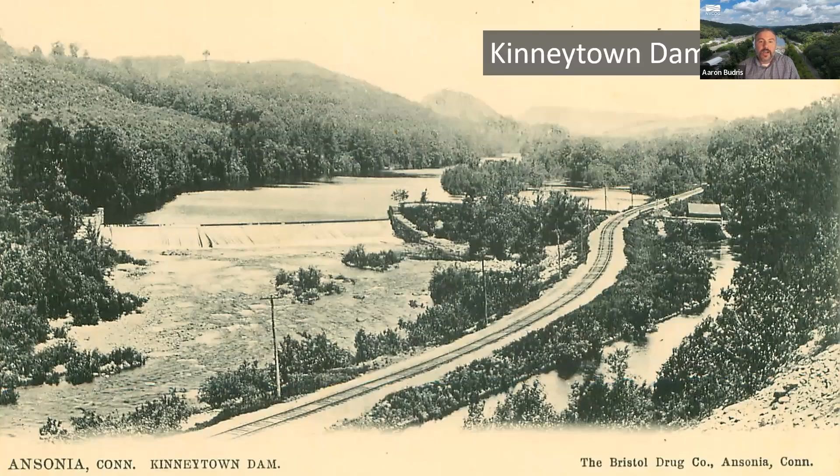So why are we removing Kinneytown Dam? Kinneytown Dam really served a very important purpose in the Naugatuck Valley for a long time. It was originally constructed in the 1840s to divert water from the Naugatuck River into a canal that led to downtown Ansonia, where that water drove industry for over a century.

Later on, the facility was converted to produce hydroelectricity and send that electricity to the grid. It was regulated by the Federal Energy Regulatory Commission, or FERC, as a small hydro project. So it provided electricity to the grid for decades, providing power to residences and businesses in the valley.

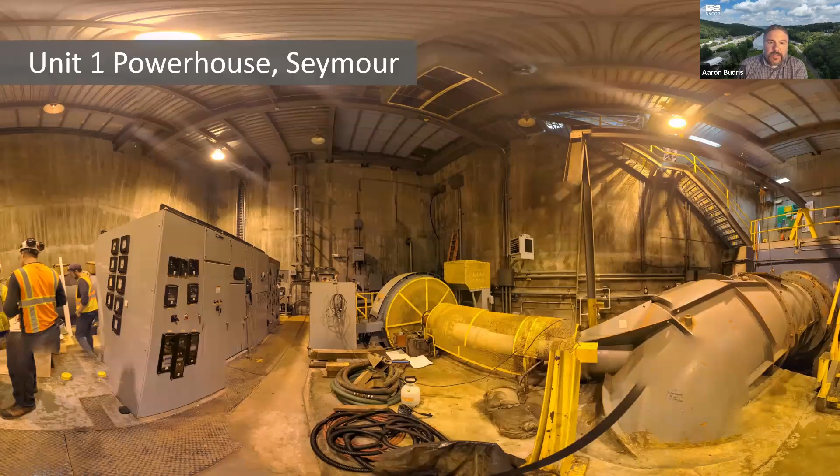But today, Kinneytown Dam doesn't serve any useful purpose. It hasn't produced electricity since 2013 at one of the generating units, and since 2020, it hasn't produced any electricity at all. The previous owners made very little investment, and more recently, no investment at all in maintenance. So it's out of compliance with its FERC license.

The cost of bringing the facility back online in compliance with its FERC license far outweighs the revenue it could ever produce selling power to the grid. It's in really poor condition, and it's just not commercially viable as a power generator.

And that's not just us saying it, the people that want to remove the dam. The previous owners made serious efforts to sell the facility as well, but the market came to the same conclusion. It just does not make any sense as a hydro facility in that location.

So the previous owner was effectively abandoning it, and the facility was just continuing to fall further and further into disrepair. For 175 years or so, Kinneytown Dam really did serve a valuable purpose in the valley, and now it provides no benefit at all, but it's having serious negative social, economic, and environmental impacts. The only real way to remedy all of those impacts is to remove the dam.

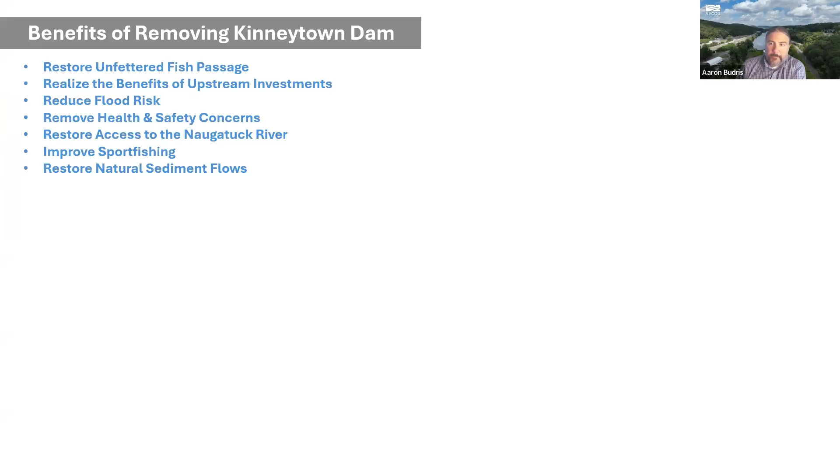So in addition to the financial straits that this structure and this facility is put into, there's quite a few benefits to removing the dam. Save the Sound works on dam removal in a lot of different locations, and this project is one of our biggest and most potentially impactful.

Restoring the benefit to fish passage, the migratory fish species that are likely to benefit from 30 plus miles of main stem river habitat and 30 more for tributary habitat, is a pretty substantial lift for a single project.

We're also capitalizing on the benefits of the upstream investments that have been made. There's a bypass channel at the Tingue Dam. There are multiple dams removed upstream, all providing fish access and reducing safety hazards.

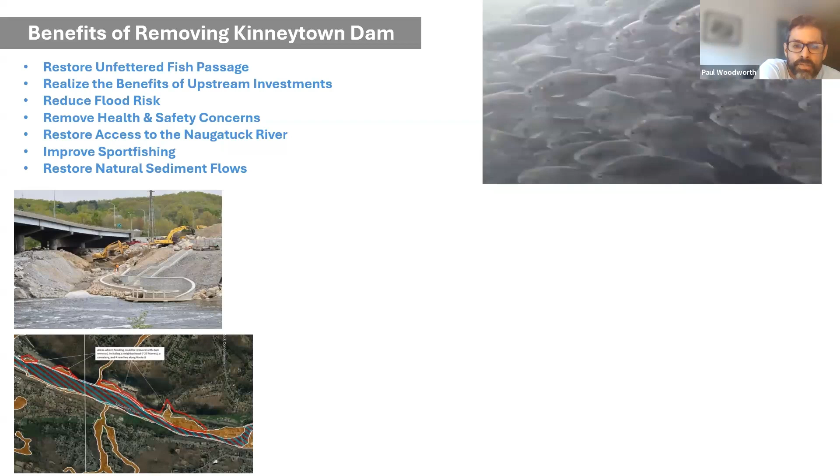This project also will engender some reduction in flood risks to the neighborhoods in Seymour upstream of the dam, which are currently subject to some nuisance flooding. This would lower water surface elevations during some of those smaller events and reduce some of that nuisance flooding.

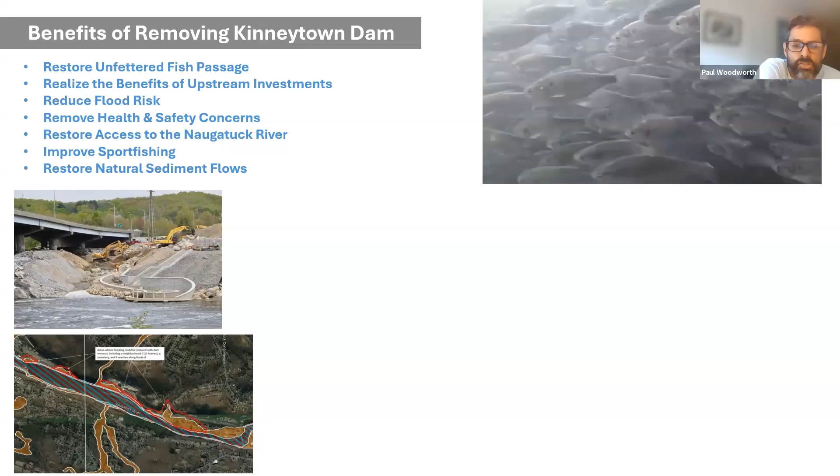There's also health and safety concerns associated with the canal and obviously the sediment that is built up behind the dam. We're also looking to restore access to the Naugatuck River.

Reconnecting the greenway that's existing down in Ansonia and Derby area and bringing that all the way up into downtown Seymour. With this removal, and the increased fishery, we'll have improvement in sport fishing.

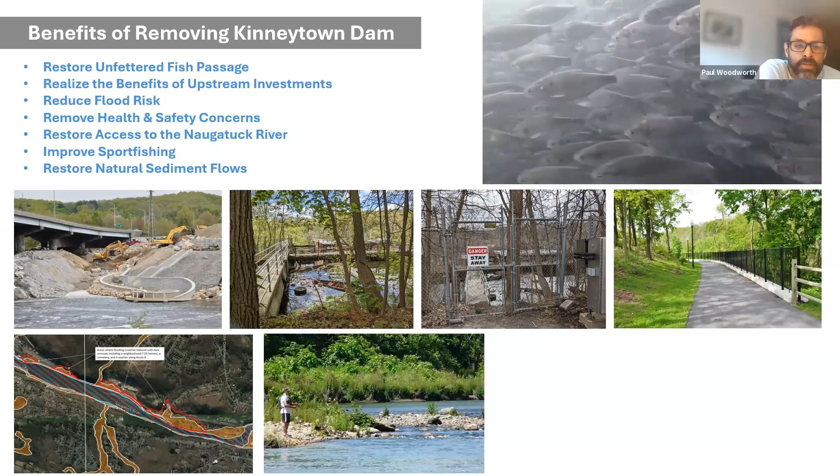In addition to the access to do the fishing in areas that are currently not accessible, we'll also have a broader fish community to fish from.

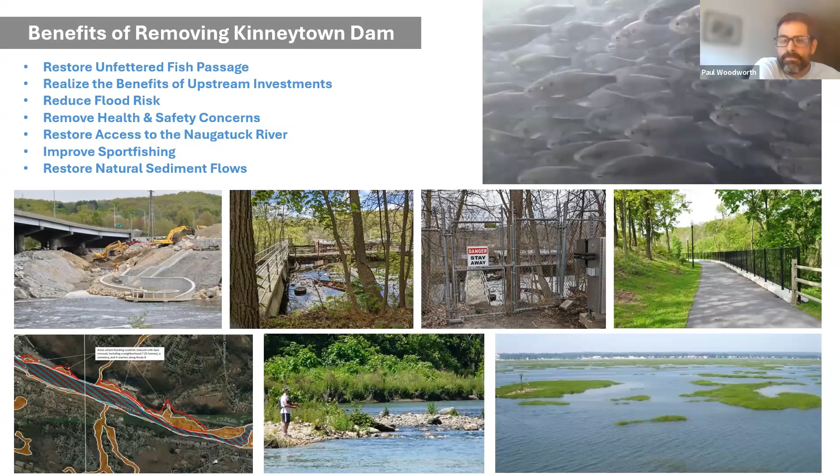And then in the longer term, sort of a bigger picture ecological effect, is restoring the natural sediment flow of the river that's been held back for so many years. So quite a few environmental benefits to this project.

So, we've been working on this project for a few years, and we're just going to give you a quick overview of what the project entails.

We have acquired the facility through the Connecticut Brownfield Land Bank. That was really the first step, was to take ownership of the property.

We've been working on the engineering and design of the removal. We need to relocate sewer infrastructure that's owned by the town of Seymour that goes underneath the river upstream of the dam.

One of the big issues with dam removals, and this one in particular, is managing the sediment that's built up behind the dam. We're going to talk a lot more about that in a little bit.

We need to work through FERC, the federal agency that oversees the project, to decommission it. They have to give the go-ahead to do so, and we're ultimately going to remove the dam, which is actually 2 dams that are part of this project.

Once the dams are gone, we're going to restore the Naugatuck River. As Paul said, develop recreational access to the river, and extend the Naugatuck River Greenway Trail. And we're committed all along this process to engage with stakeholders and residents throughout the entire project.

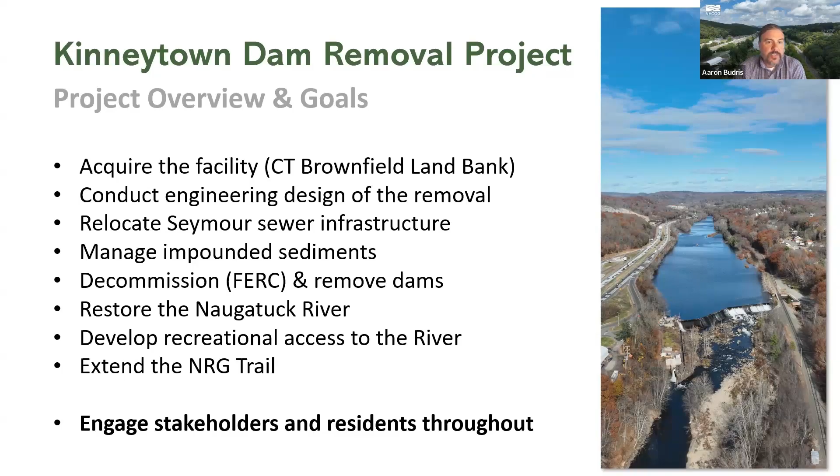As restoration is one of the major goals here, we've got a few guiding principles. We're going to follow all the applicable laws and regulations at both the state and federal level. We're looking to protect the environment and wildlife, which comes part and parcel with dealing with the sediment in a responsible manner.

We're trying to protect the infrastructure that's going to remain, that's Route 8 and the Waterbury rail line on either side of the river. Both need to be protected long term. We need to leave the entire property in a safe state, the footprint of the Kinneytown Dam and powerhouse, Coe Pond, and the area surrounding the Ansonia structure. Ultimately, we're trying to provide safe public access, perhaps under the existing bridges along the rail line, with the overarching goal of restoring river ecology.

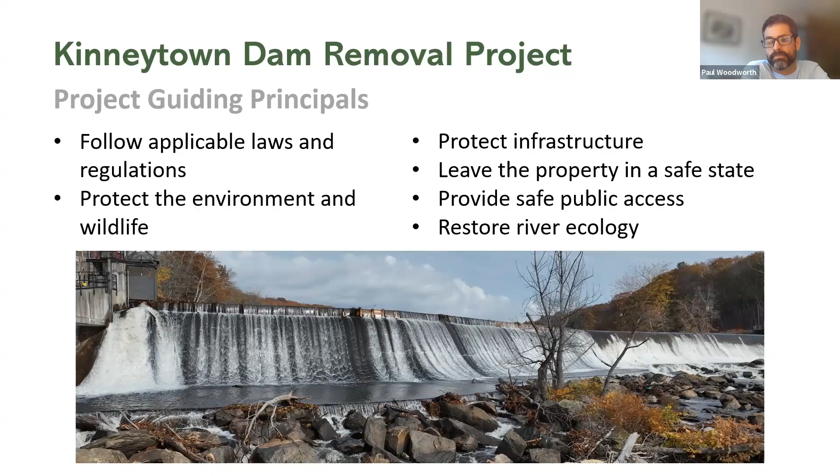We've put together quite a bit of funding for this project. We still don't have enough money to do the entire project yet, but we got started with a pretty big grant in 2023 from NOAA, the National Oceanic and Atmospheric Administration, who gave us a $15 million grant. With the state of federal affairs right now, they've informed us they're going to be withholding a fair amount that we have not spent yet, a little over $10 million. But that's not going to stop the progress we're making right now.

We've found other funding committed to the project. We have funding from Connecticut DEEP through their supplemental environmental program of $1.6 million. That's going to fill the gap in the short term so we can continue our design work and sediment management work. We've also had a huge commitment from EPA's Targeted Brownfield Assessment Program, and we'll talk about some of the information they were able to gather for us that's going to inform the sediment management and the dam removal.

We have quite a bit of congressionally directed spending allocated to the project, and funding through the DEEP Rec Trails program for trail design of the Naugatuck River Greenway through the property. You may have seen in the news this past week, we've been awarded $4 million through the DECD Municipal Brownfield Program to help us get started with sediment management. And the really big thing is the state legislature has committed $25 million in state bond funds to this project.

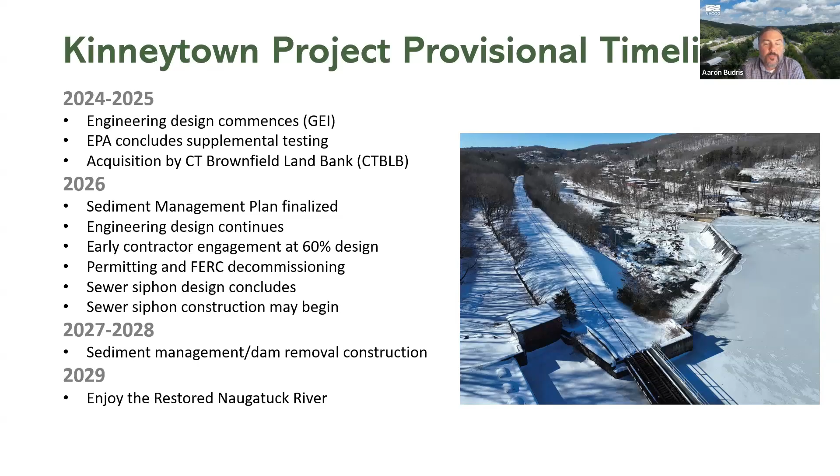So just to give some updates on some of the major parts of the project, the biggest movement in the past several months for us has been the work we've had to do now that we've taken ownership of the property through the Connecticut Brownfield Land Bank. They acquired the property in October of last year. The land bank did send encroachment letters to several properties or residents who were encroaching on the property.

We submitted a transfer of hydropower exemption to FERC. So the Connecticut Brownfield Land Bank now holds the hydropower license. The previous owner had been ordered to do a whole list of things by FERC, very few of which they ever did or were interested in doing.

A lot of those pertain to restoring the hydro power facility and restoring power generation. We know that's not possible, and it really doesn't make sense in the context of us removing the dam. So we asked FERC for regulatory relief for several of those items. They concurred, but Connecticut Brownfield Land Bank is still responsible for safety and compliance on a lot of safety issues.

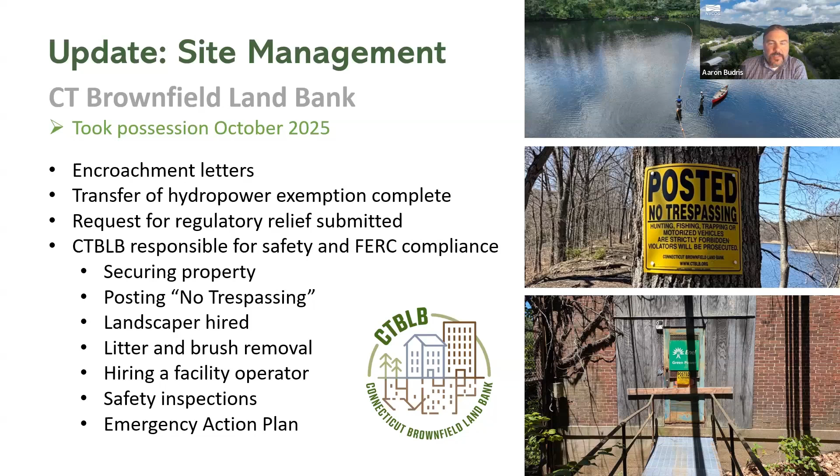On the Seymour Sewer relocation portion of the project, we've hired CDM Smith Consulting Engineers, who's doing the design to move those two sewer siphons that go underneath the river upstream of the dam. The flow from those two are going to have to be rerouted to a new siphon below the dam.

Last year we went to the town, presented a preferred alternative that the town approved. CDM's through 30% design, on their way to about 60% design. They've held a permitting pre-application meeting a few months ago. They've met with all the regulators and have a path forward on permitting. We're expecting the design to advance to a point where they'll be submitting their permit applications later this summer.

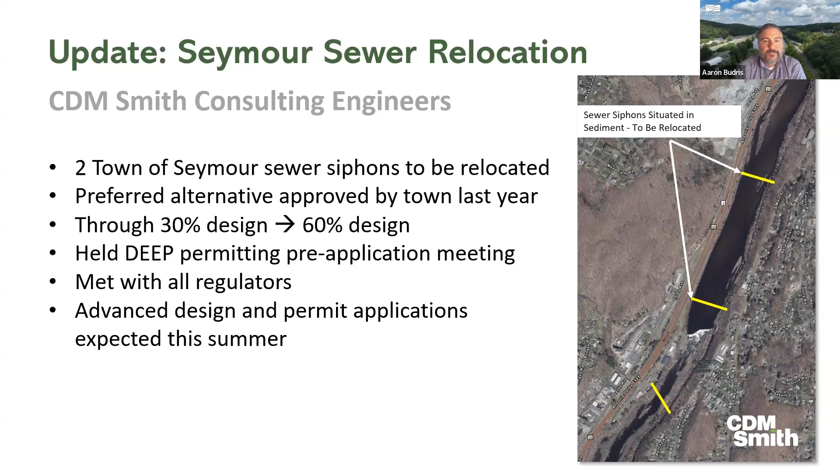Like I said earlier, we're committed to doing really robust community engagement on this project. We want input from the public. We want everybody to understand what we're doing and why we're doing it.

So, we have 2 community liaisons that are available to talk to residents or stakeholders. We've done neighborhood canvassing in the past, trying to get more people to these meetings, and we'll continue that in the future. We've moved these meetings to quarterly. We started off every other month, just so we're not repeating ourselves, and we know your time is valuable, so we don't want to bring you out to these too often, but we are going to continue holding these quarterly meetings.

We have a monthly newsletter that goes out. If you're not on that list, you can sign up on our website.

We also started doing downstream outreach to the communities, the industries at the mouth of the Housatonic that may be impacted by the dam removal. We've started early outreach to them as well.

Save the Sound is working on a documentary film. It's going to be a 3-part film. They've shot some interviews with residents of the Lower Valley for the first film, which is going to really be about the history of the Naugatuck River. So we're hoping to have something pretty soon for our team to look at, and hopefully we can get it out to the public as soon as possible.

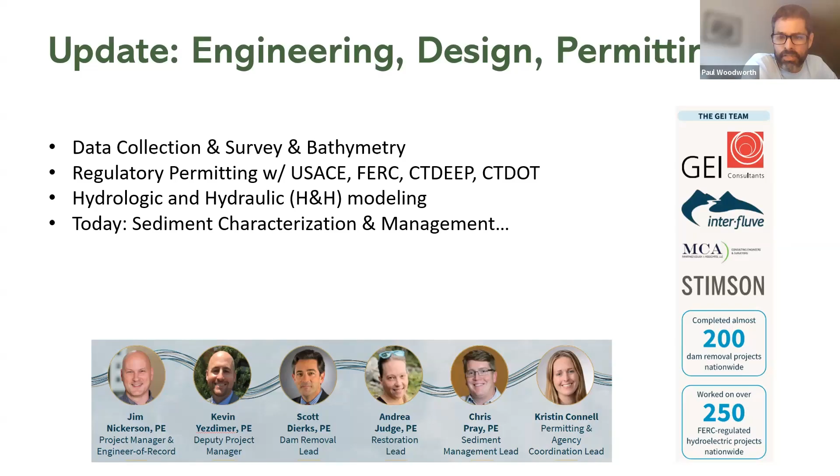Aaron, next slide. I think we have a couple of visuals of the impoundment. Were it not for sediment at this dam, this would be a much more straightforward and less costly project. The vast majority of the funds we're trying to raise are to responsibly manage this amount of sediment behind it. The upper left image shows this pillowy, dune-like surface - that's essentially the superficial sediment that has basically filled this impoundment, and it is mobilized and transported over in larger flow events.

The upper right is what it looks like when we were able to draw down water for the sake of safety and repairs to the spillway. The lower right-hand corner shows how shallow it is very close to the dam. That image shows the spillway on the left-hand side, and our staff on the right-hand side installing the safety line, basically in knee-deep water, only about 50 feet upstream of a 25-foot high dam. So not an insignificant volume, and Scott will go into more detail.

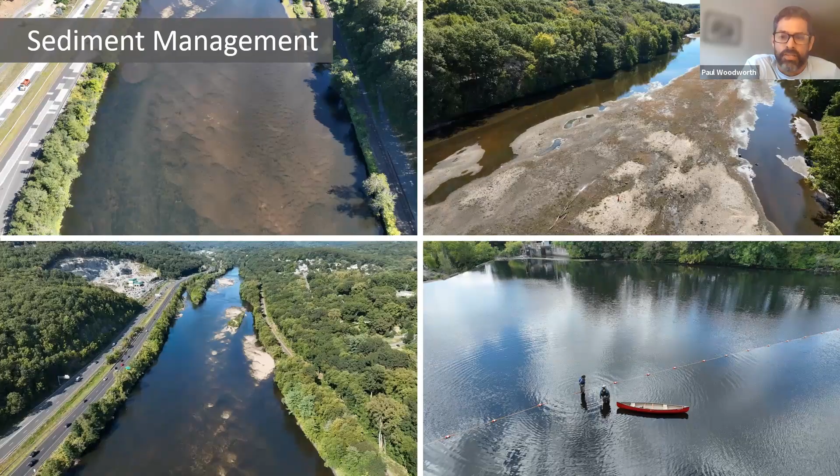Next slide, Aaron. EPA has been involved in the assessments. The phase 1 assessment was more focused on the structures and the footprint around the structures. Phase 2 became an investigation of sediment, and then we had a supplemental phase 2 assessment that looked in more detail at various depths to better characterize the distribution of contamination through the depth and across the impoundment in Kinneytown. It's with those sets of data that we're able to move our sediment management plan ahead. From there, I'll pass it to you, Scott.

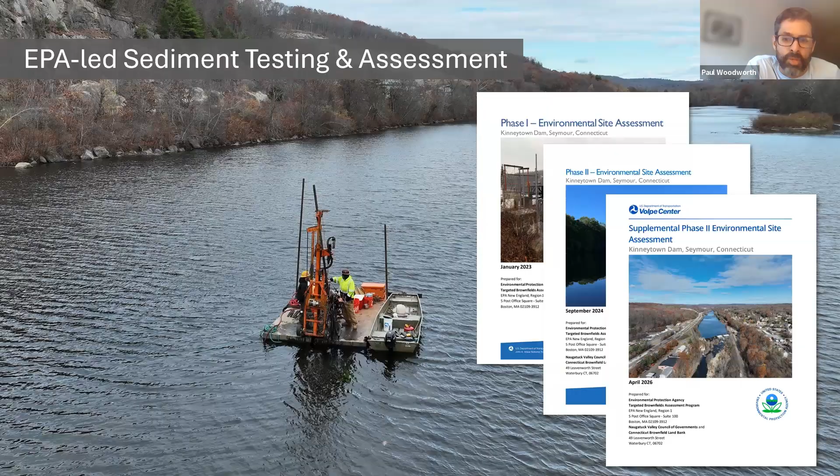Thanks, Paul and Aaron. Let's see if I get this sharing right this time. Do you see my first slide, the title slide? I see your presenter view, I believe. So I see your first slide and second slide - is that what's going out to everybody? I'm so confused. If you go up to the top, it should allow you to switch. Go to display settings and that dropdown, you can swap presenter view and slideshow, and that should set you up. There we go, there you go.

Perfect, thank you. All right, good evening everybody. Again, my name is Scott Dierks, one of the technical leads on this project for GEI. Appreciate the opportunity to present these updates, both on sediment management and on channel design - they really go hand in hand.

So I wanted to start off with a slide that I believe Aaron presented at the last community meeting. I really like this slide because it shows... let me try the laser pointer. Can you see my laser pointer now? I'll assume that's yes. Yes, we can. Okay, thanks.

What I like about this project is that you see the history of what occurs behind a dam in terms of sediment. The first thing I want to point out is this coarser material at the bottom, both above the dam and below the dam.

This is meant to represent the old channel bed, where the channel resided before the dam was placed. It's a nice representation because we're seeing the same thing at the Kinneytown Dam, where we can estimate where the channel was, both how deep it was and where it was across the channel.

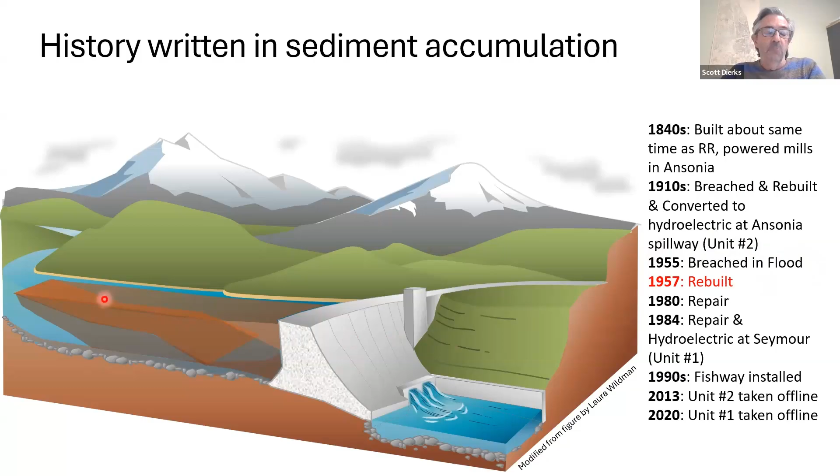Another reason I bring that up is because the dam itself has been breached and rebuilt a couple of times. The most significant was the hurricane in '55, which breached the dam, and it was completely rebuilt. When the dam was breached, all that sediment, at least to the point of the breach elevation, would have been lost downstream. So we had a replacement of sediment over time with those breaches.

The other reason I wanted to start with that slide is that the design process and sediment management process kind of starts from the bottom up. We want to understand where that old riverbed was, and we did this in a couple of ways.

There were a lot of different groups involved, including Save the Sound, our consultant Interfluve, and EPA and Volpe, out grabbing sediment samples with mechanical equipment that would drive borings down through the sediment. This material here is relatively fine, mostly sand all the way through, and then toward the bottom you can see this coarser material, which essentially represents that old riverbed where the channel used to be.

Another technique we used was driving very thin steel probes through the sediment until you hit what we call refusal, knowing that sediment at the bottom of the channel tended to be coarser, and in some cases may even be bedrock. We don't always know, but by driving these rods through the sediment, you can drive them quite deep, 15, 16, 17 feet, by hand.

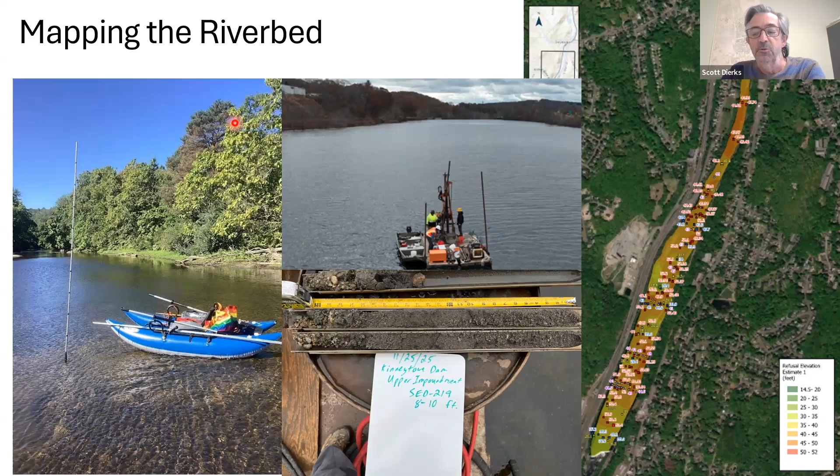While we have the depth of refusal, the old stream bed mapped, you can't map every square foot of it. So we use a set of tools to figure out how big the channel needs to be. One quick way is looking at what the channel looks like downstream and upstream. There are also general relationships in stream design work, knowing how much water we have to deal with and the slope. Those are all parameters in the design process, so we come up with an estimate of how big and deep the channel needs to be, and how much room is left for floodplain.

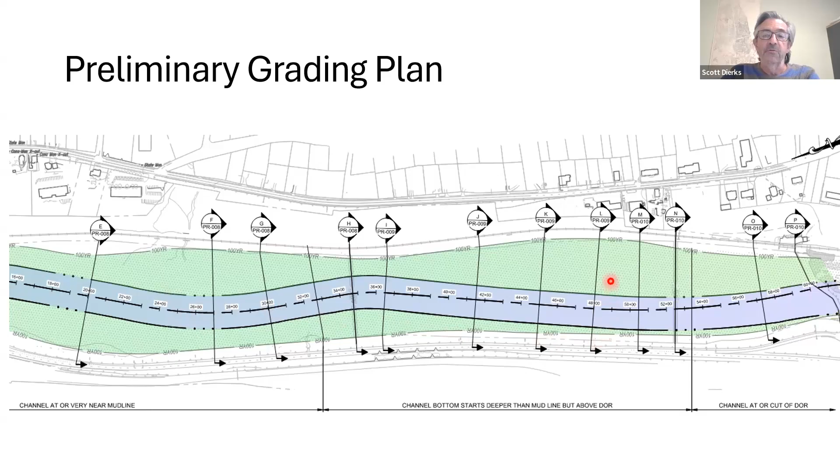Here's an example where the black lines represent 1-foot increments vertically. You can see the channel banks descending down to the proposed channel bed, and then grading along the banks, or valley walls, of the channel.

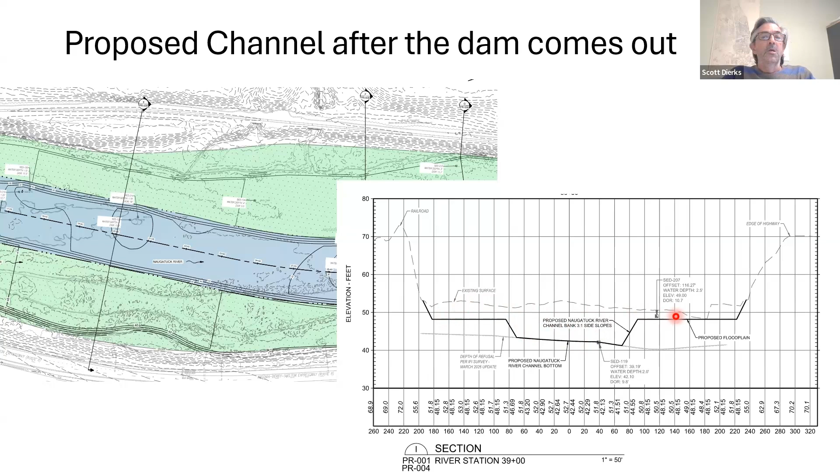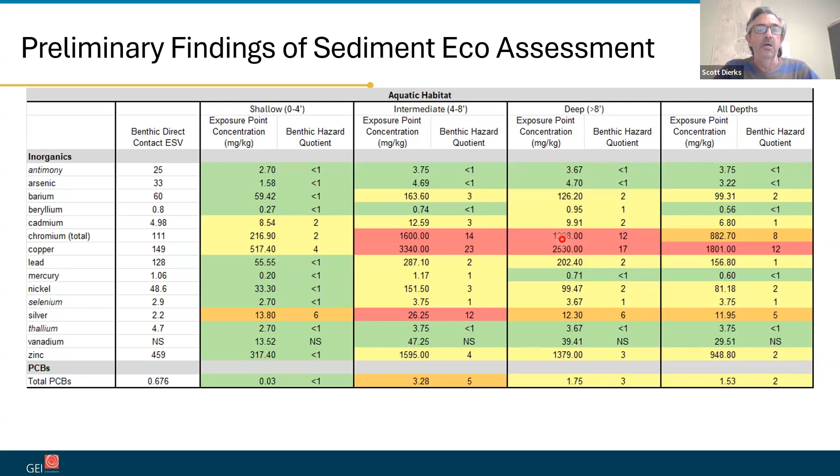So the newer sediment, the 0 to 4 feet, shows green meaning no ecological impact whatsoever. Yellow is potentially no impact but with some marginal concern, and orange is marginal to some impact, but nowhere near the intensity seen in the lower sediment. So we basically have three buckets. This data was developed by Volpe and EPA, who sampled across the impoundment, taking sub-samples at depth so we'd know at what depth we were seeing these constituent concentrations.

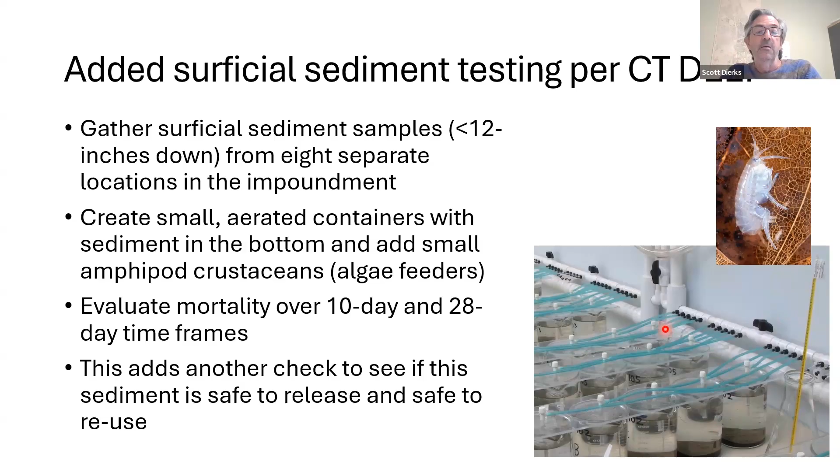So now moving on—again, sediment management and the dam removal and dam design all work together, so to speak. Everything at every step of the way, both in the removal process and in restoring the channel process, we have to keep an eye on sediment. First off, I'm going to give you a broad overview of the dam removal process and how it will potentially play out in Kinneytown.

First off, we will lower the river. We've got some pipes and some valves that we can use to lower the water level a little bit. And then at some point, we will have to start literally notching the dam.

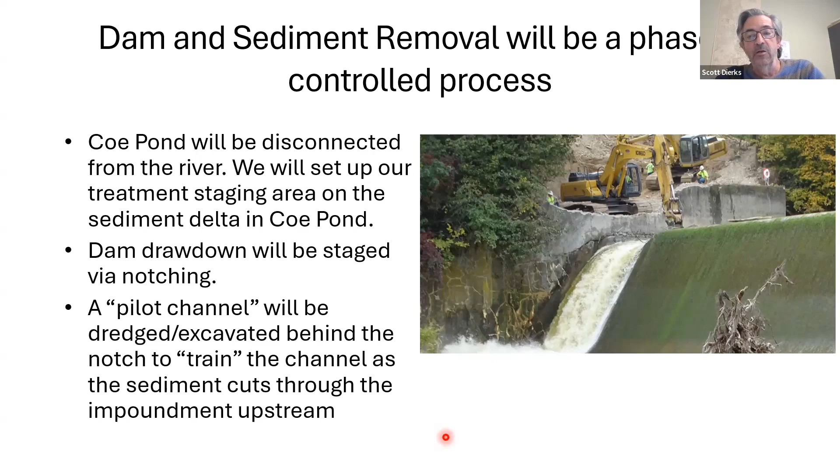And then the other thing we're going to do is—we can't exactly put the channel back where we want it to be, so as the notching is done and the drawdown occurs, we will be excavating a small channel to start to train the river, if you will, to where we're trying to keep it, because obviously we don't want it moving up against either valley wall. We can't afford that, period, the end. So that'll be part of that process.

We will have multiple control points for sediment. We believe we're going to be able to release some sediment downstream, but at this point it's going to be a pretty small proportion of the total sediment behind the dam, and it will only be sediment from that top 4-foot layer.

So one of the things we'll do below the dam is create what we call a sediment trap. These are turbidity curtains—long curtains weighted at the bottom with floats at the top that go all the way down through the water column. We can't string them all the way across the river, obviously, because they won't withstand the force of flow. So we create a set of barriers that push the water, slow it down, and allow settling to happen, so that if there are inadvertent releases, we're controlling them.

The siphon project will actually create an access down here, and that will provide a way for the contractor on this job to actually excavate out sediment that gets trapped behind the curtains.

So we will be monitoring something called turbidity. Turbidity is basically how turbid the water is, right? Clean water, you can see right through. Turbid water looks like coffee.

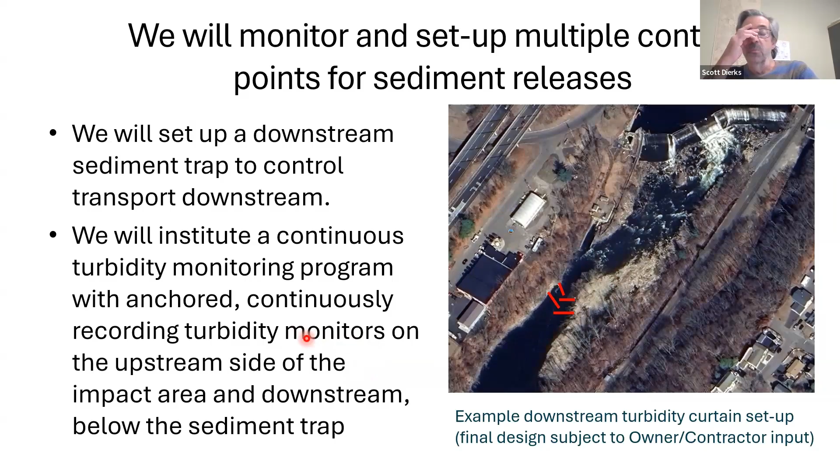So we'll be continuously monitoring the water in the Naugatuck River below the dam and keeping an eye on turbidity, so that if somebody doesn't actually see an inadvertent release, the continuous monitors will tell us if we're seeing more sediment than we're allowed to let go down. There'll be a number of contingency measures to deal with that kind of issue.

So again, back to the buckets. The good news is more than half the sediment that we have to touch is essentially clean. And what that allows us to do is potentially release some of it.

And once the Naugatuck hits the Housatonic, this 50,000 number becomes more like a quarter to one-fifth the total sediment that the two rivers contribute downstream. So in the grand scheme of things, what we're talking about right now is not a lot of release downstream.

Some, but most of the sediment, what we're planning on doing, is using the sediment both within the impoundment, because once we cut down that floodplain, there are going to be areas where we have some contaminated sediment. Some of that contaminated sediment may come out. Some of it may get covered with the clean sediment.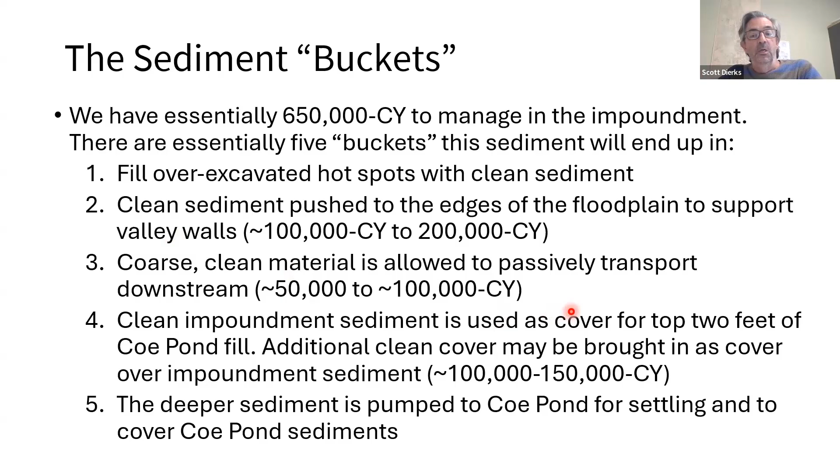And then lastly, again, because we have a narrow valley, narrow river, we have the highway on one side, the railroad on the other side, we may use some of the clean sediment to build up the valley walls, particularly the toe where the valley wall meets the floodplain. When we get to that point, we potentially will be building that up again as a way to manage the sediment, but also as a way to help stabilize those valley walls.

So part of moving the sediment will potentially be by hydraulic dredge. Some of it will be mechanically with equipment as the impoundment dewaters. Because it's mostly sand, we believe after enough time we'll actually be able to drive equipment out into the impoundment to do work that way. But we will also be dredging.

This is from another project we've worked on in Michigan, and these are the hydraulic dredge lines. So the sediment is basically liquefied with river water. It's pumped through the lines. The idea here is the canal may actually be filled before we start work due to the sewer project. We may be filling it as well, but essentially running those hydraulic dredge lines

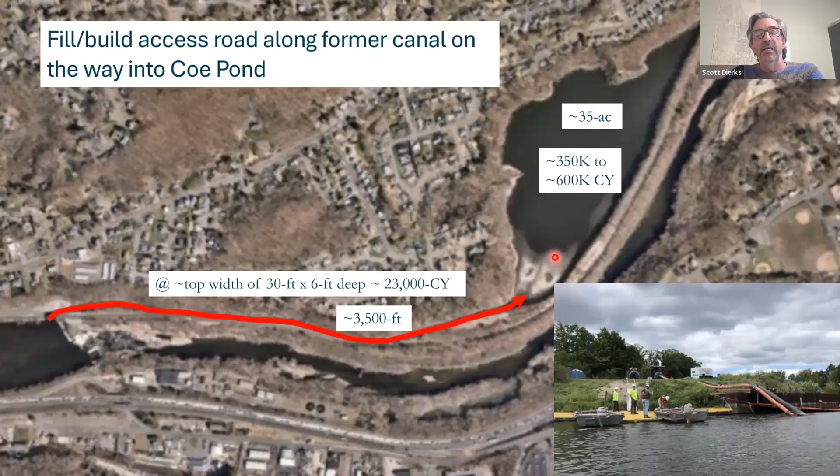to Coe Pond, setting up our dewatering operation and our treatment operation. I won't go through all the details of this, but suffice to say, what we're doing is we're settling the sediment where then the water comes out of the sediment. We're separating it, and all that water will get treated so that this part of the treatment facility will be settling all the metals.

And then that water will go to a series of filters. This is a multimedia filter to get out all the solids, if you will. And then this is granular activated carbon, which for anybody who has a Brita, this is a giant Brita. It will take out essentially everything else.

So all the organic chemicals, and then the waste of the treatment process will actually go - I'm not showing it here - but all the solid waste goes off-site to a landfill, and then the treated water goes back to the river.

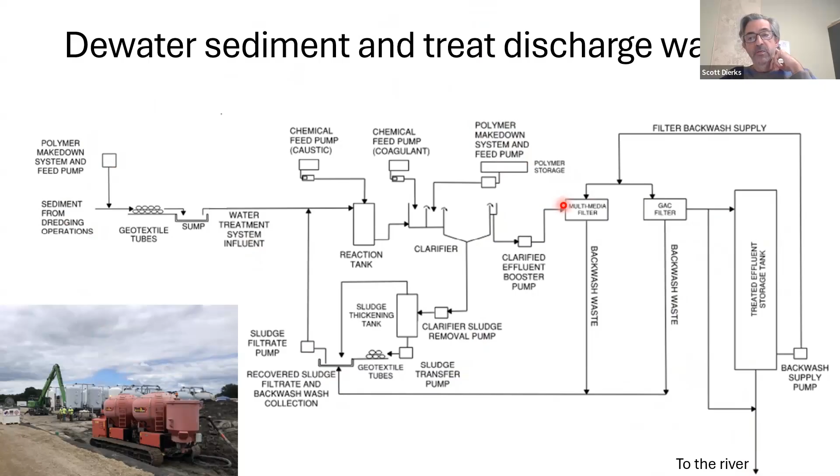So all the sediment that makes its way to Coe Pond will undergo dewatering and water treatment before the sediment is actually used as cover for the bottom of Coe Pond.

So finishing up here, just a couple more slides. This is a high-level conceptual schematic of what Coe Pond might look like. We're going to catch the water. There's a small tributary that comes in, and there's a couple stormwater ponds.

On top of the cover, we will create an open channel, an appropriately sized channel that will convey that water above the cover, the clean sediment, back down to the river.

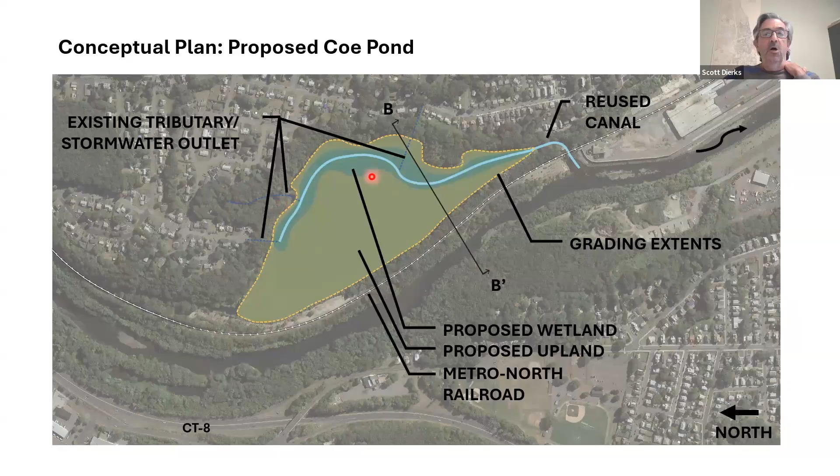And then the entire area, depending on trail plans—because the trail will probably come through here—but this will all become a naturalized area. So naturalized upland, there'll be a little wetland area around the channel itself, and then there'll be the channel that will convey all that water so it doesn't seep down through the cover and into the sediments below.

Here's what that would look like in cross section. So now Coe Pond has this one small water feature with the wetlands.

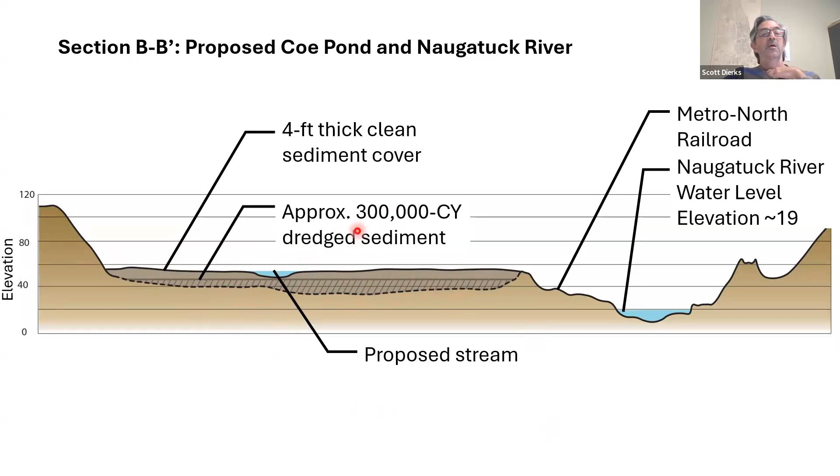And then we've got about 300,000 yards of dredge sediment now sitting on top of the old Coe Pond sediment, and then 4 feet of clean sediment cover over the top. And the river itself,

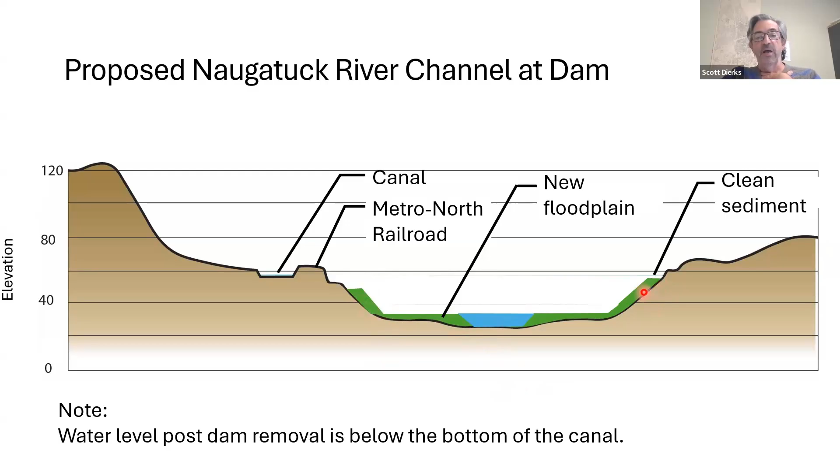Here now is the channel cut down to the depth of refusal to the old riverbed. Here is the floodplain, and here is, again, potentially some of the clean sediment—that top 4 feet of sediment—used to buttress both those valley walls and the infrastructure that sits on top.

And that's it for the presentation. I think Aaron already covered some of these dates: finishing up the sediment management plan this fall, finishing up our draft design drawings also in the fall, starting our pre-application meetings at that time when we essentially have the plan and the drawings ready to distribute to the agencies, and then potentially, as Aaron said, soliciting a contractor bid this winter to start what we call the design build process.

And I've been doing this for almost 30 years. I've worked with lots of different contractors, and I will just say they almost always can come up with better, more efficient ways to do things than I can. So I welcome the process of bringing them in, and these are going to be substantial contractors.

These are contractors that work all over the states, that probably work globally, who have a lot of experience with this. And so we'll get the plans in a state where we think we've got a pretty good idea of how everything's going to go. The contractor will come in and say, well, I've got some better ideas on how we need to do this. And we'll incorporate those ideas as we finalize the plans and apply for permits.

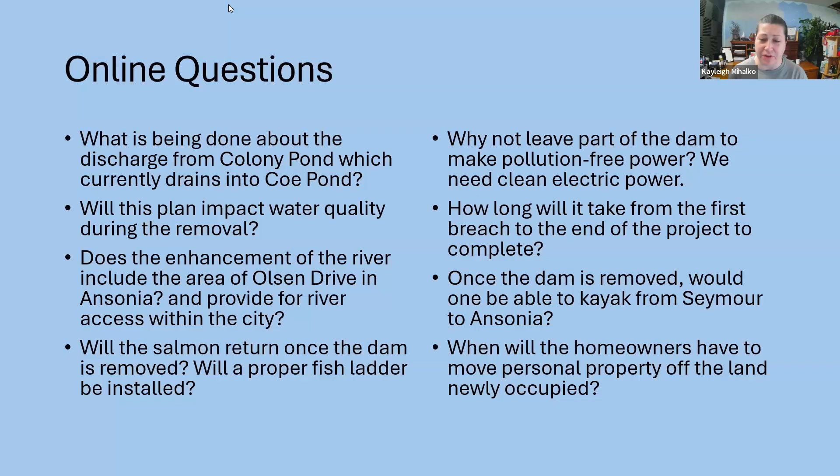What will the noise level be? Will the neighbors be impacted? We're going to have excavators down in the impoundment. I think it'll be a very low rumble because they're going to be in the valley. The water treatment operation - those kinds of pumps, essentially pumps and generators - so there will be some noise associated with it because it will be down in Coe Pond. But again, you're going to be... I don't remember how many feet that slope is, so it won't be the same kind of noise as if they were situated at the same elevation. I'm not going to lie, there will definitely be some noise, but I think it will be mitigated by the location of it occurring in the valley itself.

Kayleigh, I could back up to his first 2 questions there. Why do the sewer siphons need to be relocated? There are actually 3 sewer crossings across the river. 2 of them are upstream of the Kinneytown Dam, and they are in the sediment but not under the river bottom. So when the dam comes out, they would be suspended above the riverbed and exposed, and they're old enough that it's time to replace them. Then there's another sewer crossing downstream of the dam, sort of downstream of the sewer treatment plant itself, and that's not an ideal location from the sewer system perspective. So all 3 of those are being replaced with a single crossing that will be closer to the sewage treatment plant, but still downstream of the dam. The sewers can't be left in place because they would be fully exposed to the elements and flow.

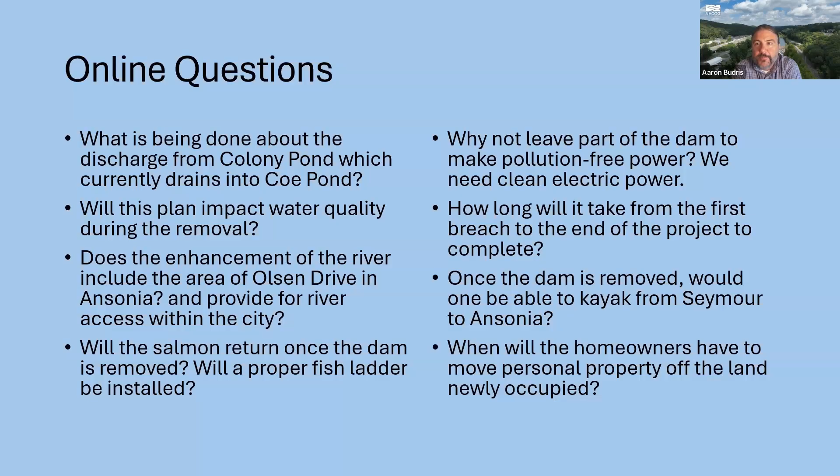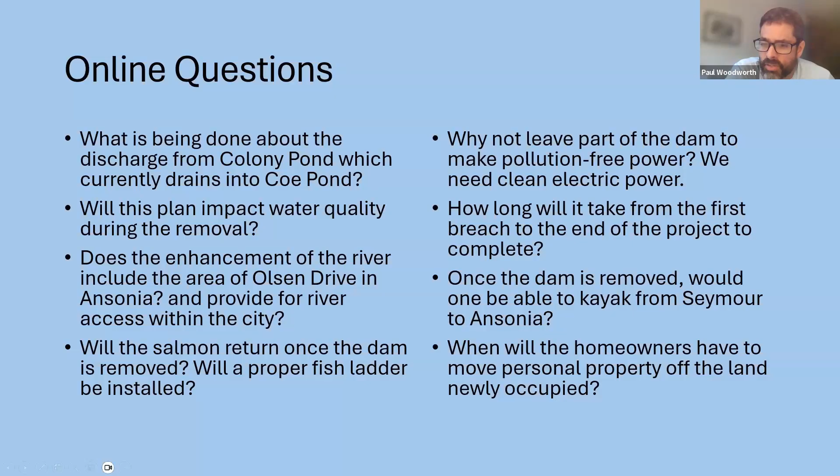So that's the questions on screen, and I see other questions in the chat, so I can move over to that. Would the heavy metal sediment that will be covered with clean fill and left in Coe Pond eventually leach into the river? We believe not. Right now is probably the worst situation we have, which is contaminated sediment at the bottom of Coe Pond.

with about 17 feet of water pressing down on it, creating a pretty strong hydraulic gradient that could be moving pollutants underground and eventually out to the river. When the project is done and Coe Pond is no longer holding 17 feet of water, that would reduce the hydraulic gradient and the risk of that material being mobilized. It's not to say there would be no pore water or groundwater whatsoever, but it would be a drastic improvement over the current conditions, which we think are pretty worst-case scenario in terms of the potential for mobility of contaminants out of Coe Pond back into the Naugatuck River. So our clean cap is anticipated to be a substantial improvement over that.

And then the question that asked there: is the fish ladder at the Tingue Dam in downtown Seymour working? Yes, we believe it is. We, as in Save the Sound, are working with DEEP—we just got a grant to explore some new technology for monitoring fish passage, and we're hoping to use the Tingue Dam.

It's actually a bypass channel, a natural-like channel that goes around the spillway, and then there's a short step pool technical section that fish are able to move up. DEEP has a monitoring station there, a video monitoring station. The video monitoring station is what's not working very well. They believe the fishway is working well, but their ability to monitor it is not working that well.